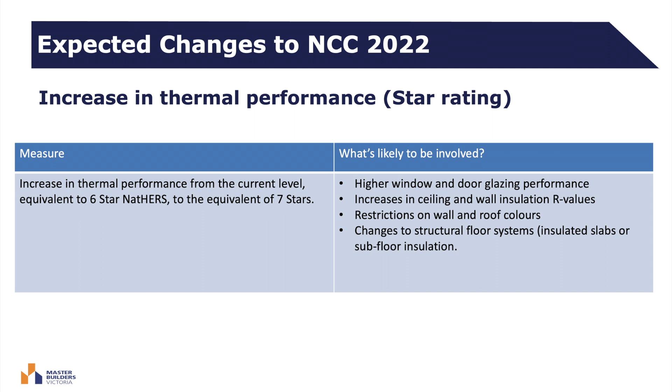There's a whole of home energy use budget. So for the first time, we're now starting to look at some of the fixtures inside the house as well. The air conditioning and heating systems need to have minimum levels of efficiency. They can trade off each other, but there are minimum levels required, which is a good thing. The hot water systems, the lighting, and if there's a swimming pool, the spa pumps associated with those facilities. So they'll come together as a major equation where a limit is to be met. They can trade off each other, but for the first time there's a limit on the amount of power being used on those sorts of appliances.

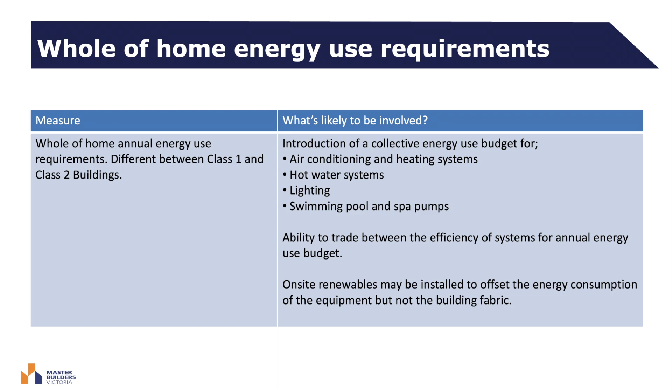On-site renewables can be used to offset some of the extra energy use of those appliances, and we're probably seeing that anything with a swimming pool will need some sort of on-site renewable energy. There are enhanced condensation management provisions in the code, and this is one we're starting to gnash our teeth on at the moment, so there's been a lot of discussion around it. We're starting to see changes which deal with those issues. There's ventilation for roof spaces to make sure there's plenty of drying air going through. There are changes to sarking requirements, and an additional requirement for roof ventilation.

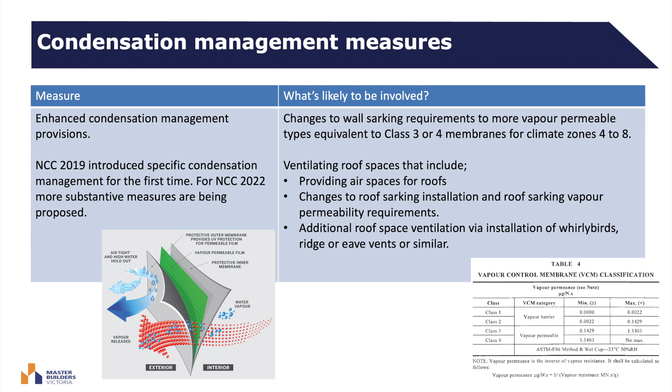And of course, the big one is a move to more vapour permeable membranes that are used to wrap our buildings. Class 3 or 4 membranes for climate zones 4 to 8, which for us is most of Victoria except the drier and hotter areas in the northeast on the other side of the Great Dividing Range. What that means is we're starting to use a material that's a bit more like Gore-Tex rather than a crappy bit of aluminium foil. So it'll allow the building to breathe. It'll allow water vapour out of the building, but stop the rain coming in, a bit like our Gore-Tex jackets, which let the sweat out but stop us getting wet. So that's quite a major one, and we're hoping it'll help alleviate some of that vapour movement through the walls, making sure we're not getting interstitial condensation occurring.

All our vents and ceiling fans will need to be vented out of the buildings. There are minimum flow rates for exhaust fans, so they'll go straight out, not into the roof space anymore, which is a bit of a worry when I look at my house. But certainly, they're going straight out, and again, just removing more of that water vapor that's getting in the roof spaces. And there's some fabulous pictures around of very wet roofs as well. So there's a provision for ventilation in laundries and bathrooms containing a dryer, and they also should be vented out anyway. So those sorts of things.

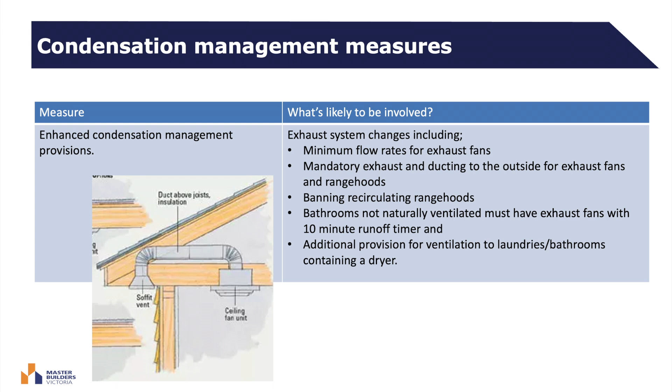As I mentioned, condensation is really important, and it's something that we can control a little bit, but a lot of it is due to occupant behaviour as well. So everything we do in the house produces water vapor. So cooking, washing, exercising, drying our clothes inside. I get phone calls from builders building houses in very cold climates, telling us that their clients have got issues of condensation on their windows. And they've probably got a fire going and are drying all the clothes inside because it's been raining for 3 weeks. So that might have a little bit to do with it. So the issue is we're trying to control something that's largely driven by occupant behaviour as well. But we're certainly starting to see that.

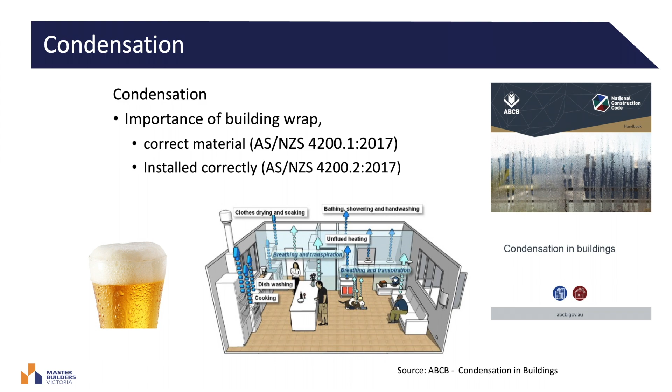There's a bit of information out there, and we're trying to get more information out there all the time. It'll be a major push for us in the next couple of months to get more information out to the industry about how they protect themselves from this sort of thing. We already have a flyer that we hand out in what we call our handover kits. So when a builder hands over his house to his client, he gives them a little kit, and there's some information in there about condensation management for them as well.

For class 2 buildings, so apartments, those sorts of things, we're starting to see some new ideas there. So the idea that thermal bridges aren't a great thing. The photo there is of an extension being built about 5 steps from my house. Architectural design signs all over the building, but a really basic thermal bridge there, if you like. The steel frame of that extension being connected to an external frame that a small roof cover, a veranda, was going to sit on. So in the summertime, when the temperature's 38, 40 degrees out there, that's a north facing veranda. That's just going to travel straight through those beams, straight through the insulation into the house, really basic sort of stuff. But we're still doing it, and that was 2021.

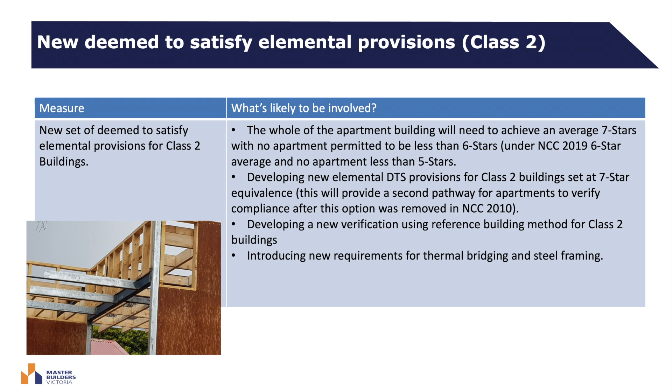We're also starting to think a little bit ahead of time and starting to design and build our buildings so that we're ready for the changes. So putting in the provision to have charging stations fitted in commercial buildings and apartments as well. So that's really important that we're running that wiring so it's ready to go as required. Nothing would be worse than trying to run some pretty heavy duty electrical wiring through some of these buildings once they've been finished. So that's really important.

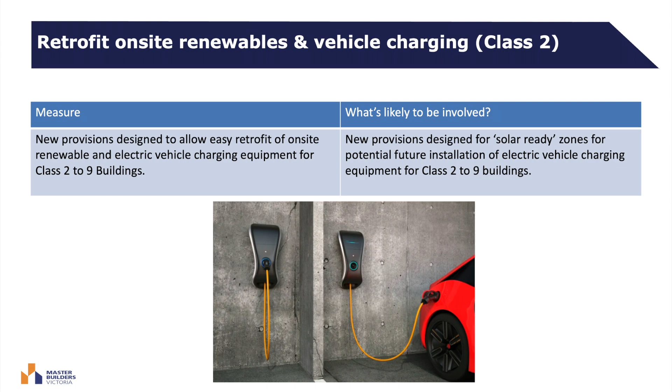And I know even some of our members, and Jeremy's here tonight talking about that, some of our members are already having that conversation with their clients as well, whether they want to run some wiring for future connection for those sorts of things to their garages as well. So that's really important. We had our judging of our Best Sustainable Building Construction Awards earlier this year, and every building we looked at that was entered in that category had already put in charging stations for electric vehicles. So we're certainly well on the way there.

And I just wanted to talk briefly about some of the things we're seeing. A little bit of a positive note, I guess, that we're already starting to see this. We're talking about meeting emission reduction requirements in the very near future. We're already building homes that are zero carbon. So these homes are already producing more energy than they're using. They're not that expensive. They're not that fancy. It's not difficult to do. We've got quite a few of our members working on these sorts of houses, and these aren't boutique builders either. They're pumping out quite a few of these houses every year.

So it's affordable. They're building them at about 7 stars. We know we can do them at about 6.5 to make them carbon positive, but these ones are about 7.3 stars. This one comes with a 5 kilowatt system and a battery. It's all electric, and that's the other change we're starting to see, that most of these houses now are all electric. And I was talking before, this is my first year. Our old gas central heater died during the summer this year. It came on by itself for some reason and wouldn't go off. So I disconnected the whole thing totally. And this was the first year we relied on split systems on the wall for heating our house.

And our bills come in about $700 less just this winter around that sort of change. So a massive change. So yeah, whether we do it for the environment, whether we do it for our pocket is another matter. But SJD Homes are bringing these in. They're costing that extra cost at about $10,000 to $12,000, so not a huge cost for that sort of thing.

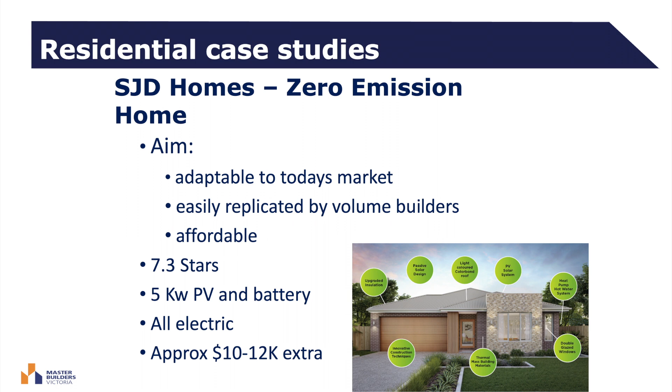Look, and I just want to finish with some of the things we're doing. Tuan spoke about the Green Living Program. We've been running that since 2007 inside Master Builders in Victoria here. We trained about 1,000 people in that program, and then we changed it and we run that program as part of our course where, when tradespeople come to us and want to become builders, they do a certificate in building and construction. And we've run that as part of that course for probably 10 years now as well. So we've probably put about another 1,000 people through that course as well.

The idea is we're trying to build the capacity of industry. So it's not just about standing there and saying, no, we don't want this. It's about trying to show how people can do these things and how they can future-proof themselves and their business, but also protect themselves. We just finished a series of workshops in partnership with Sustainability Victoria. Jeremy, who's here, presented at that as well. But just taking people through these sorts of things, showing them how they can do it, showing them that it's not that hard, and bringing that change to the workforce, if you like, to the industry.

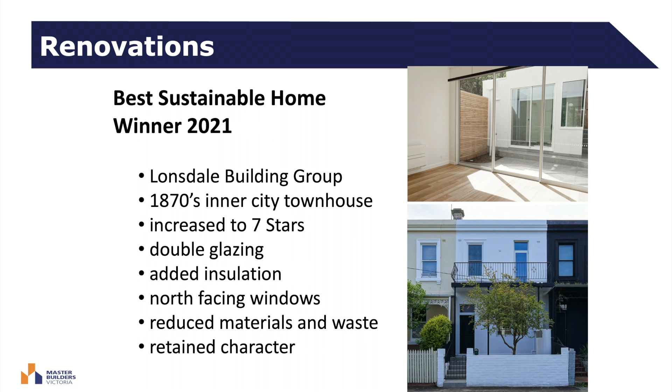So tick number 2. They double glazed it. They added insulation. They put in north facing access, not windows, but high skylights. Reduced materials and waste. And increased the star rating for something that was, I think, about 1.5 to 2 stars when they started with it. And it's now rating at around about 7 on NatHERS. So a really good result there, and this is the sort of next step of what we're looking at.

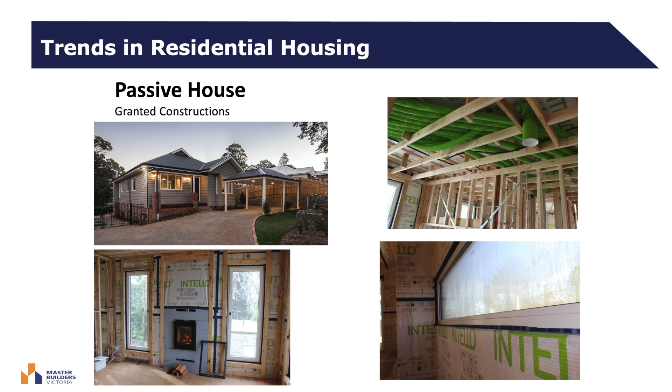And Jenny talked about passive house. We've got a bunch of really clever, smart builders out there building passive house. I'm hearing about more and more of these projects all the time. When I first heard about passive house a few years ago, I thought, yeah, that's nice, but I don't think we'll see it in Australia. We're seeing projects like this all the time. What I liked about this house is it actually looks like a real house. Some of the passive houses are an acquired taste, I think. But this one I quite like because it looks like a normal home. And I'll leave it there. Thanks very much.